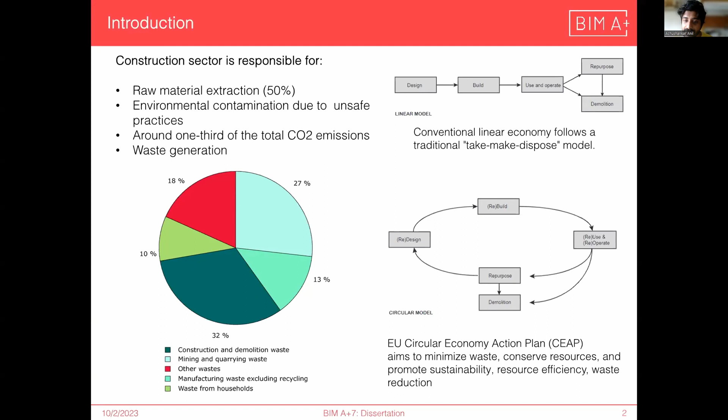So we need to shift from this linear model to a circular model, where at the end of their life, the materials that are obtained from a demolition or deconstruction can be used for future constructions. The use of existing materials in building stock for future construction is called urban mining.

A small study was conducted into the building typologies in Portugal to understand the available materials and the major materials that were used. Buildings older than the 1900s were not considered because they might have a heritage value, and newer buildings are not yet suitable for demolition. So in the 1900s, the main observation was the use of reinforced concrete

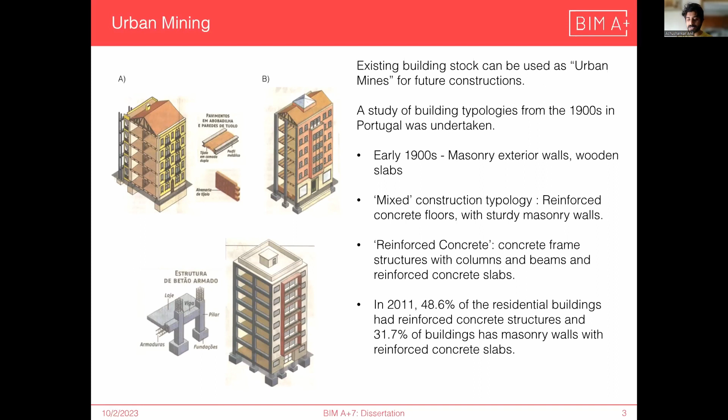and load-bearing masonry walls. As of 2011, almost 50% of residential buildings were made with reinforced concrete structures, and 30% with masonry walls and concrete slabs. So there needs to be a framework to manage the end of life of these buildings, and this work explores the use of BIM to do the same.

So I'll talk a bit about the Recycle BIM project, of which the University of Minho is a partner, and it aims to create a framework for using BIM to manage circularity of materials and demolition products. It includes a scan-to-BIM workflow of demolition and defining information rules for making a model during demolition, and also connection to marketplaces, so the materials that are obtained from a demolition can be sold to customers in the marketplaces.

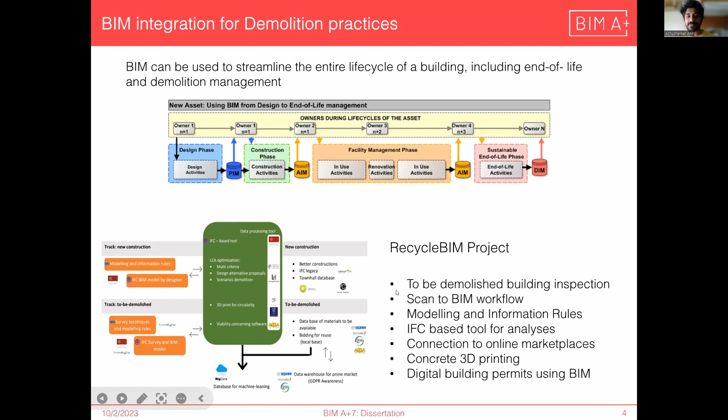And so these concepts are explored, and the objectives of the dissertation are explained here. The first part is to establish what information is required from products and materials to make sure sufficient information is available for the marketplaces and for stakeholders to make decisions. The second part is to define the requirements to make a BIM model so that this process can be facilitated, and also to define the granularity and exchange requirements of the model, which helps to standardize the process, and also validation of the created IFC file using an IDS validation workflow.

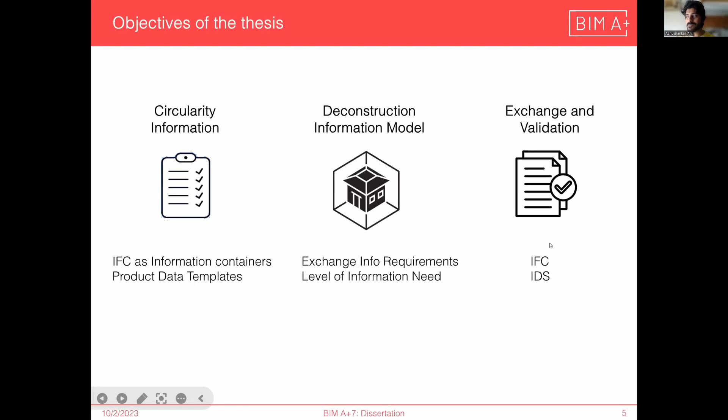So the first part was to understand the market and the main components of construction and demolition waste. Concrete, bricks and blocks are almost 80% of all generated waste, but there's also a market for glass and metals, which are already kind of established because they're high value in recycling. And there's also a market for reclaimed doors and windows.

There are also European guidelines for construction and demolition waste management, and a Portuguese framework as well. These guidelines specify that materials should be classified according to whether they're hazardous or inert, and also whether they can be reused or should be recycled if they can't be reused. If not recyclable, they should be set up for material recovery or energy recovery. And the last option is landfilling.

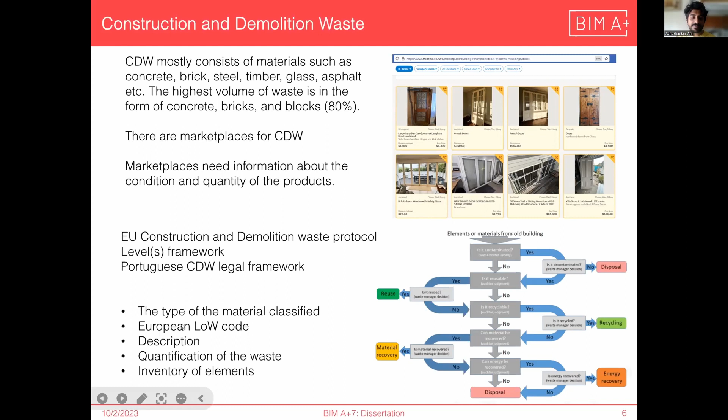So based on the market study and the guidelines, we defined a set of circularity parameters. This work is based on the open format IFC, so the capacity of IFC to store information of buildings was also explored. IFC built element was explored as a virtual model which could store information of building elements.

According to the study, there are various types of IFC built elements which have different geometry requirements. Some of them are extruded objects which have a single material with a profile, and some, like walls and slabs, have multiple materials with different thicknesses. So each object is stored in a different way. And then there are assembled objects like curtain walls, which are made up of multiple component materials like a panel and a mullion. These are the different types of built elements that I explored.

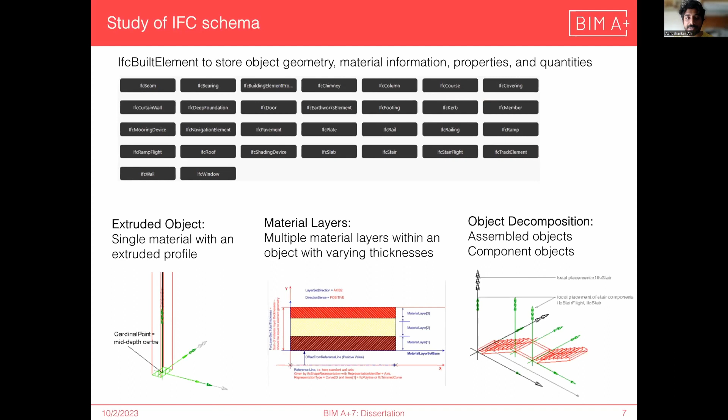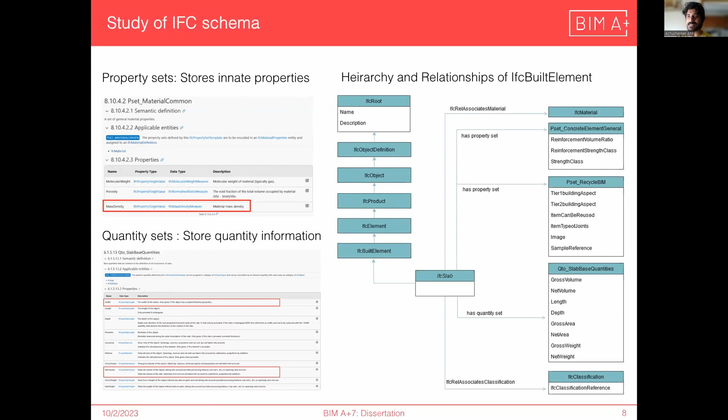And also the capacity of IFC to store property and quantity information was explored. This figure elaborates how a built element is related to materials, to property sets and quantity sets, which store its quantity data, and also classification. This also helps when we perform the validation function, and when we define the requirements, so that each object has information stored in the right places.

So moving on, based on the studies, product data templates were made for each built element, which define a set of circularity parameters and quantity information for each element.

So based on this, like a door, for example, when it needs to be in the marketplace, the customer should know the exact unit size of the door and window, for example. And if it's a wall which is going to be demolished, we don't really need to know the length and width, but we need to know the volume of the materials that are contained in it, so that it can be resold as aggregates or blocks, for example.

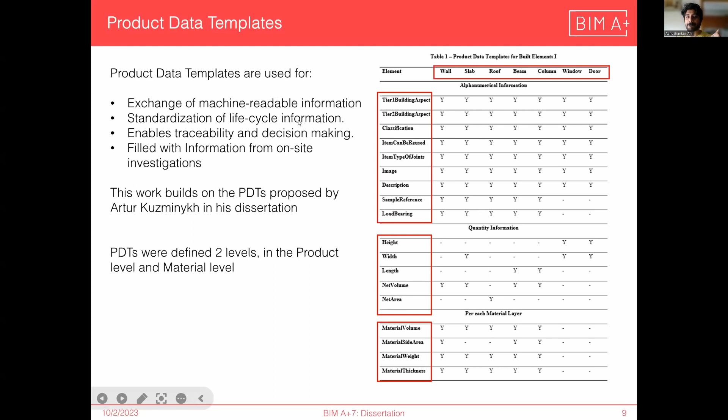So product data templates were made for products and materials because they have different requirements. So the product data template for materials was explored for a few major materials like reinforced concrete and steel and wood, and the various properties that are required from them are also defined here. Also defined is the data type of each property and where it should be stored, so that in the IFC, there is no ambiguity about what type of data is stored and where it's stored.

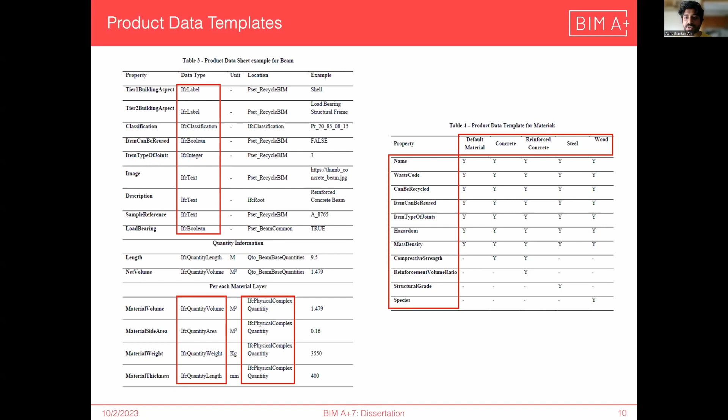So moving on to the actual model. So to create a deconstruction information model, which is what we are calling this model, which will be used to help us facilitate the demolition workflow, the inputs and controls and outputs and actors were identified. So the workflow is: a demolition company will be hired to do an audit. They will do a laser scanning, and as a result of the laser scan, a BIM model will be created. It will also have information about the building which is already existing, like plans and sanction drawings and stuff.

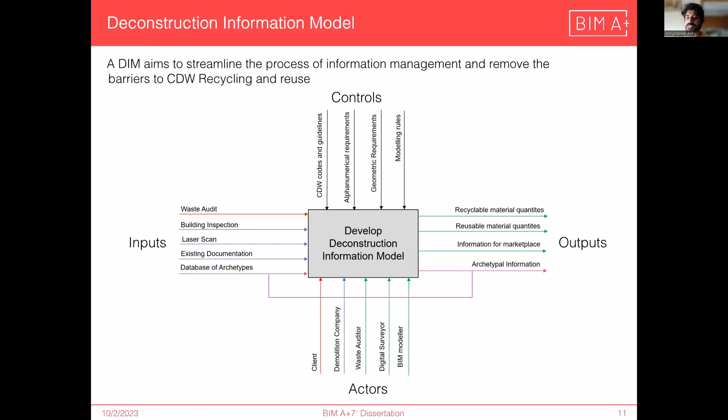And the controls would be the construction demolition based guidelines and the alphanumerical requirements from the model, the geometric requirements and the modeling rules. And the output is a quantified and classified set of products and materials, which can be fed into the marketplace so that customers can access this information.

So to accurately define what the information requirement is, the ISO 19650 defines exchange information requirements, which has information requirements, which include project information requirements, organization information requirements, and asset information requirements, and also the level of information need. It includes acceptance criteria, which includes information production procedures and standards like project units and data authoring softwares. So if we define this, it's clear for everybody involved that these are the standards that have to be followed.

It can also include RACI matrices, which assign responsibilities to each party. The EIR should also include supporting information, such as existing documentation and guidelines. And also the delivery milestones should be defined so that the goals are set up and the dates for each goal are also set up. So that's all regarding EIR.

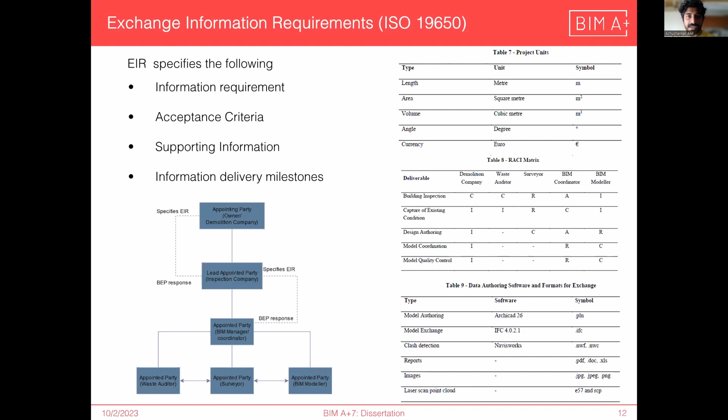And then to define the granularity and extent of information to be produced: this is a demolition, so it's the end of life. So we don't need to produce excess information. So to control the amount of information that is produced, we can use this framework, level of information need, which defines the level of alphanumerical and geometrical information from each building object, like walls.

So this table was made for the major building elements, which defines the geometric requirements from each, such as for walls. It has to be in different layers, and each layer should have a different color. And also the identification, so stating that the object should be classified according to Uniclass, and the object type should be IfcWall, for example. This ensures that there's no confusion when we go to the marketplace. So each object is according to a classification.

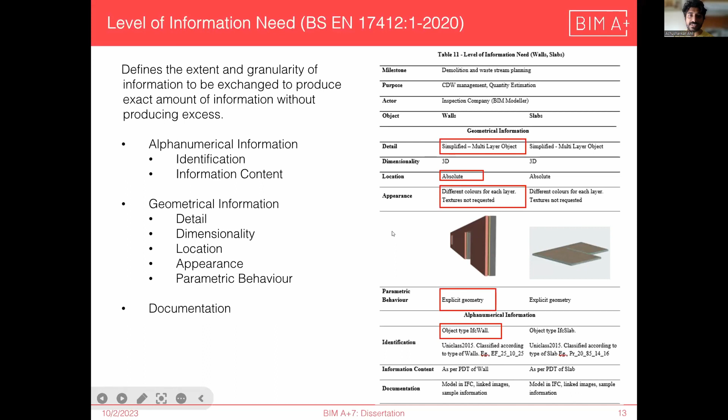So based on the exchange requirements and the modeling rules and the information need, a model was created in ArchiCAD 26. And it was made sure that based on the information requirements, walls were modeled with different material layers, with each individual thickness. The assembled objects were modeled with component objects such as plates and members, for example. And it was ensured that all the requested information, the circularity parameters, are also included.

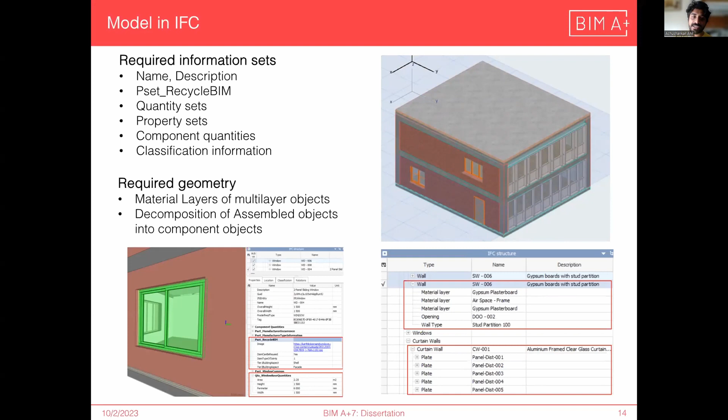So when we have a larger model, it becomes hard to validate the presence of information manually. So that's when a validation workflow with IDS comes up. IDS is an XML format file where we can specify our requirements from each element, and it will automatically check the IFC to make sure that the information is present in the model. So this was done using an online IDS converter, which is open source, and also edited using Visual Studio Code.

So the created XML was checked against the IFC with BlenderBIM, which creates a validation report, which states that okay, the walls have this property, the slabs have this property, but this property is missing from these walls. So this report helps us to populate the actual model with the required information, so that the model follows the exchange information requirements, and it's not missing any information. So that was the final step.

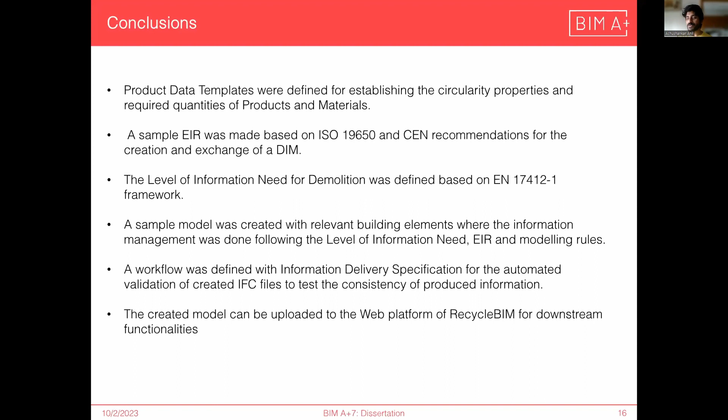And for conclusion, this is a summary of the work that was done. So defining product data templates for products and materials, EIR based on 19650 for the deconstruction information model, the level of information need for demolition based on EN 17412, creating the model in ArchiCAD and then exporting to IFC, and then validation of the file using IDS. Yeah, so this model can be used for the Recycle BIM project for their functionalities. And that's it for my presentation.